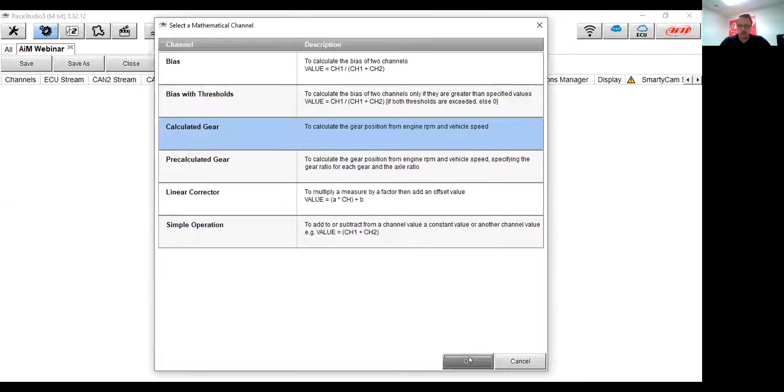Once you click OK there, you get a little window that pops up, and it will tell you your math channel settings - so you've got your name, first things first. Roger and I talk about this, and we definitely agree that this should stay as calculated gear. We think it's always nice, if you're sending your data to somebody, or if you forgot what you were using, to know that this gear was calculated and that it didn't come from the ECU or a gear potentiometer or anything like that. So definitely leave it calculated gear.

If you want to cut it down, you could change it to calc gear or whatever makes you happy there.

The next item down is our sampling frequency. This doesn't actually play a role in the calculation. When you're driving around the track calculating the gear, this is just a matter of saving the data. So it doesn't make much sense to increase this beyond 10 Hertz. We definitely recommend just leaving this at 10 Hertz—it's going to give you the best readout later on.

It's kind of funny when you do these webinars and dig into stuff we've all been working with for years. Cameron, you may have found the same thing—other folks who've co-hosted with us too. The more we dig in to try to teach something, the more we learn. That very topic, I didn't fully understand—I thought it was the calculation rate. It's cool to learn as we go. That's just the output of the data being thrown into the data file. It's calculating much quicker than that in real time behind the scenes, very fast. But that sampling frequency is just what's being used, 10 times per second, to throw it into the data file. It's a cool thing that we all learn every day in everything we do. We go through these channels so frequently you think you know exactly what you're talking about, but when we do the deep dive to present it, I definitely learned a couple things. Pretty cool—an interesting one.

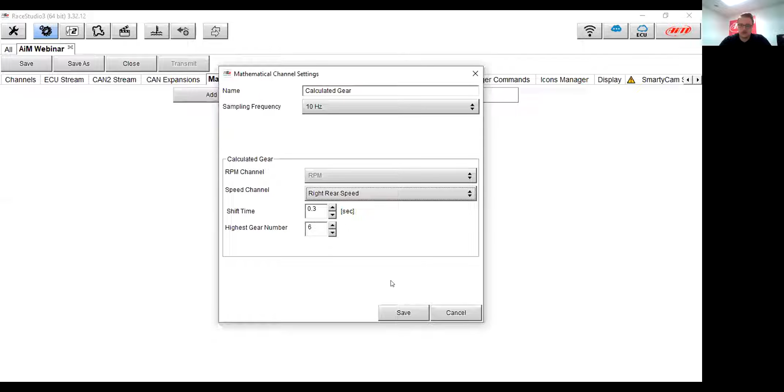I don't want to gloss over the wheel speed itself. It's recommended to use a drive wheel speed that is directly linked to the transmission and engine rotation once the clutch discs are completely engaged. This gives us the most realistic view of what's actually happening with the vehicle. GPS speed isn't going to give you the most accurate information, so you've got the option for GPS if you must, but it's best to use a driven wheel speed. I've got a wheel speed set up here, and if it's a rear-wheel drive vehicle, rear speed is best, so we'll choose that. So we've got those two things taken care of.

Next thing we've got down is the shift time. Like Roger and I were speaking earlier about how we learn things, I actually learned something here. On the pre-calculated gear, there's a little bubble that pops up to explain it, and we've asked to have this transferred over to this side as well—but it's commonly misunderstood.

So this is actually going to be the time that the measured values have to be held to be set as a valid gear change. This is an effort to try and reduce unwanted gear changes. We have to make sure that we have a steady RPM signal after, to make sure that we are going into the next gear properly. We found that 0.3 seconds is actually a good value to use, and it just helps reduce unwanted gear changes.

So we've got the shift time and then highest gear number. It's how many gears do you have? Not neutral or reverse included there.

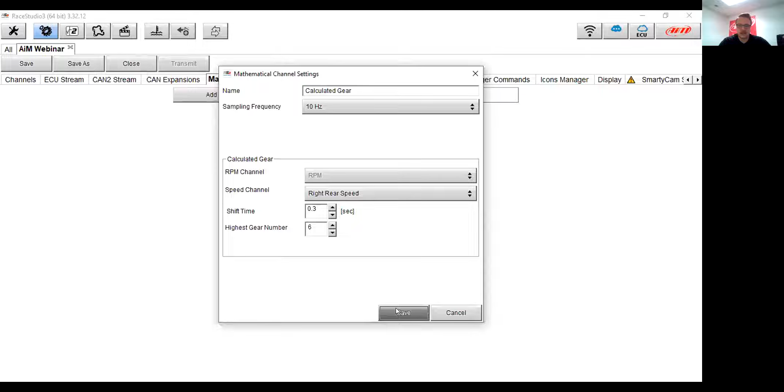So next step, click save, and it's saved. So we've got calculated gear now set up. So the one thing I wanted to show you is just setting it up as a display.

Due to the poll, it doesn't seem like a lot of people like to see it during driving. It looked like maybe about a quarter of you, but we do have a lot of these display pages that have a spot for gear, so it really just makes sense to have it there. And if you're going to be using it, you might as well be able to see it as well.

So you can go in here and just go to math channels and then calculated gear. I always go and just do a drag and drop. So we'll drag and drop it there, and then your calculated gear will be there after you click transmit. That's the big key one here. You have to be connected to your dash and click transmit.

That's going to send it off, and your next step actually will be to go over the learning process. That's what's going to make this process a little bit more difficult in execution, because the others don't require it. So I'm actually going to share a different screen real quick.

So this is actually, I'm going to give a shout out to our website here. We have a really great frequently asked questions section. When going over and trying to make sure I got everything set up properly for this webinar, I referenced the website, and it actually gives you the procedure right here to go through and do the learning process.

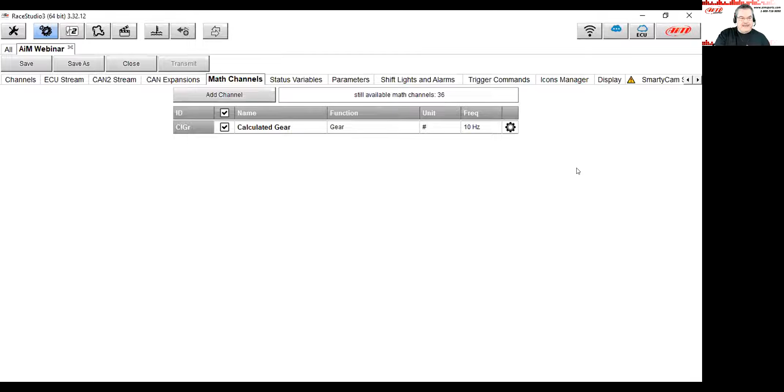Perfect, thank you. All right, so now the next one that we're going to go over is actually going to be the pre-calculated gear. We can't have two gear calculations within the same configuration, so we're going to go through and delete this one first. The way to do that is you just go over here to the gear and click delete selected math channel.

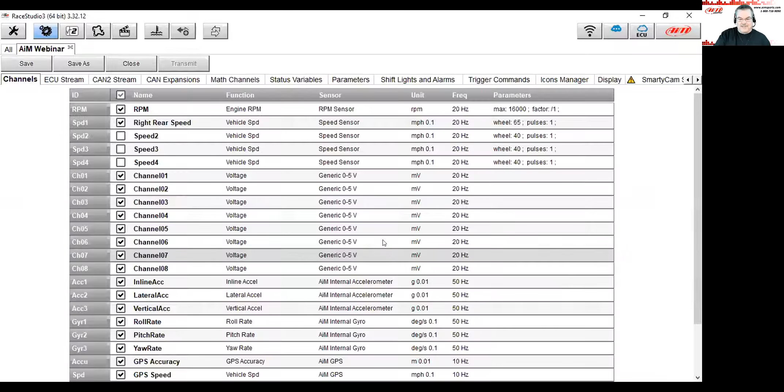Looks like you're back up and running there, Cameron. Looks like Zoom may have jumped out on us. What do you have going there now? I'm not sure what happened, but it went through and deleted the math channel, but we'll go back in and I'll show you how to do that in just a second.

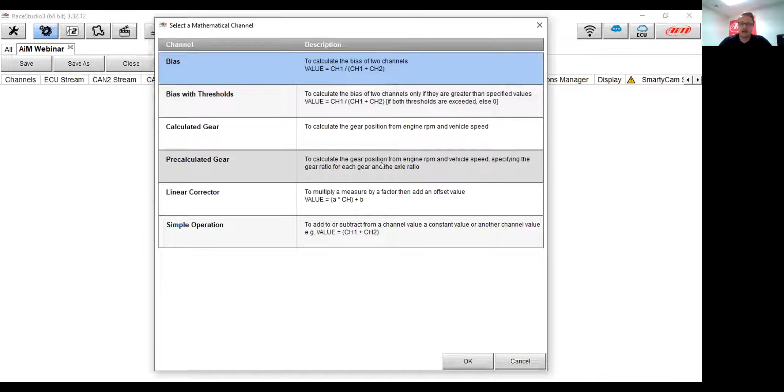So we'll go ahead and move back onto the pre-calculated gear. Again we have the quick description here. This is very similar to calculated gear, except we're just adding a few things. We're calculating the gear position from engine RPM and vehicle speed, specifying the gear ratio for each gear and the axle ratio. So we'll select that and press OK, and that should open up the very similar channel settings, except we're obviously adding a few things.

So down below that is where the new things, where the pre-calculation is going to start. Our next item down is going to be the wheel circumference, and this can be measured in a couple different ways. You could use an equation, do diameter times pi if you like, or you can measure around the wheel. There's some different ideas around the meaning of wheel, but wheel and tire will get you the same result.

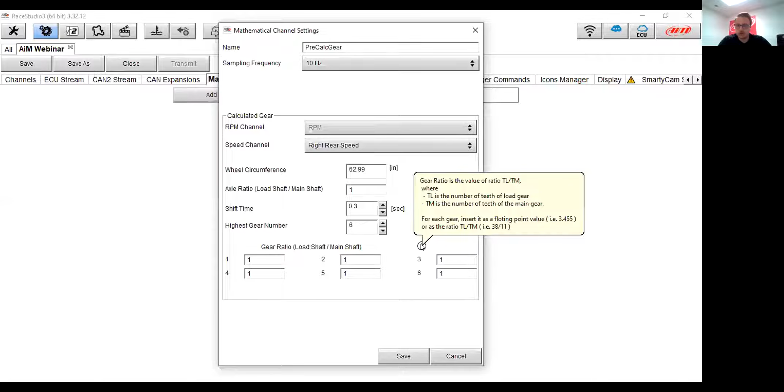Highest gear number, again, choosing your gear, neutral and reverse not selected or included. So, our gear ratio - this is all information that should be able to be found. We have customers that will find it from the internet, you can grab it sometimes from your user manual, and if you have aftermarket gears, you should be able to find it from that person. Same thing, this can be expressed in decimal or in a fractional value. If you need help, you can go over the bubble and it will tell you what it's looking for there.

As you're plugging those in, Cameron, to start that process - Antonio asked a question that you actually answered just as he was bringing it up - but to know the values of the gear ratio and the shift time, should we look at the workshop manual, or is an approximation enough?

An approximation is not enough. In the gear ratios, the axle ratio, and the forward driven speeds, you need to have those because it's looking at the RPM - what the RPM should be when it's going from the crankshaft through a gear ratio, transmission, third gear, whatever it happens to be, then all the way back to the rear gear, out through the tire size. It's doing the math on that in real time, and when it finds that there's a match, that's when it knows to show fourth gear. So that's the answer to that one.

Okay, and then Cameron, plug in some numbers. Well, actually I didn't bring that sheet over here with me for some reason. Just plug in any old number. So off memory, we could do like 3.895, doesn't generally matter - you're going to see a larger number shifting down. We could do like 3.586, and then you'll see like a 3.256. So you just plug in your numbers.

As mentioned in that question, you can find these numbers if you've got a Miata or a Ford Mustang or whatever it happens to be. Just do a quick search and you can find the stock gear ratios for that particular car, and plug them in. So basically you're just going through plugging in these numbers, and we'll go ahead and finish this, 0.852. One thing I learned while messing around with this, you can actually tab through these as well, which is nice.

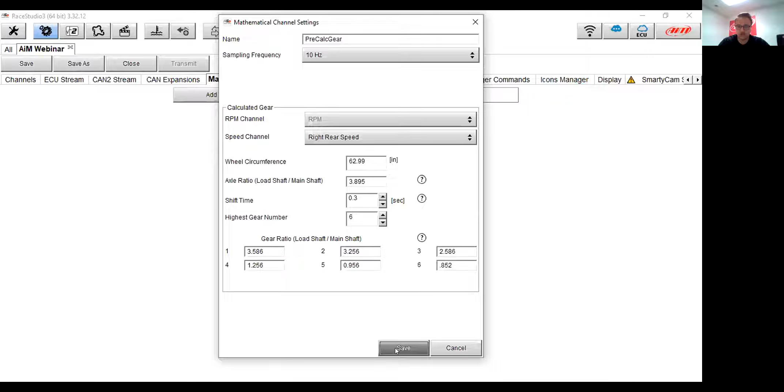So last step here in this screen is to go through and click save. Going through with the display, it's going to be the exact same thing. We're going to go to the math channels, we'll find the pre-calc gear, and you just drag it onto your display wherever you like for it to be. Then after you're done with that, transmit.

In comparison between the calculated gear and the pre-calculated gear, the great thing about pre-calculated gear is that you don't have to go out and do that learning lap. It's already pre-calculated. So you go out and start driving, and as long as all the information we put in there is correct, you'll start getting gear immediately afterwards. Yeah, the pre-calc gear is by far my favorite of the two.

We're typically going to know what our gear ratio is and our individual gears, and we do not have to do that process of going out and having it learn, as shown in that document that Cameron shows there. So for me it's a little bit of extra work to get all the right numbers for the pre-calculated gear, but in my experience, and from chatting with users, pre-calculated gear is almost flawless. If you've plugged it in correctly and you transmit it into your gauge, you could put the car up on jack stands and just run through the gears, and the gear position on your display is just going to be right off the bat, let alone out on the track, since you're using a driven wheel. So it is well worth the extra little bit of effort to do the pre-calculated gear, in my opinion.

Absolutely agree. Cameron, there's a question here that talks about the difference between motorcycles versus cars when it comes to the gear ratios that you plugged in there. We just plugged in a rear gear ratio because that's more of a sports car kind of thing. But when you have a bike and you have ratios, tire sizes, and sprockets, how do we handle plugging in something that's through a bike or a bike motor that's in a sports car?

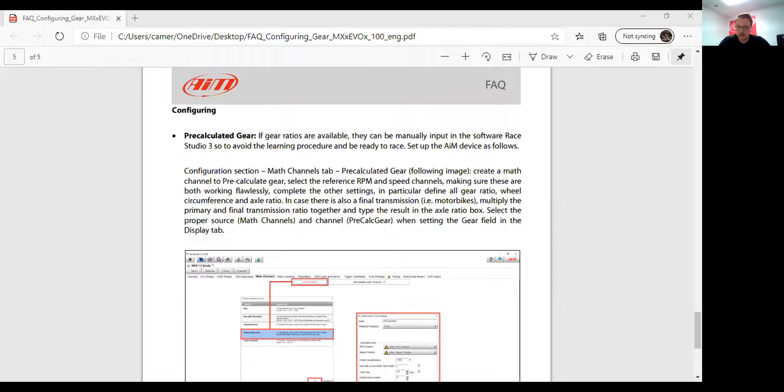Basically what we're going to have to do is, if there is a final transmission, you were going to go through and multiply the primary and final transmission ratio together and type the final result in the axle ratio box. So I'll show you. I'll go back in Race Studio 3, and this will go back to the math channels, and you just double click to edit your axle ratio here. So that's what you're going to have to do.

So in the end, if there's a multiple step, some of the off-road trucks will have, and even sprint cars and some other things, they may have a quick change, or an underdrive, and that just needs to be factored into your rear gear and your front and rear sprockets, whatever it happens to be. You just got to do the math. This has to be the ratio that it's changing after it comes out of the gearbox, in effect, right? Okay, perfect. Sounds like we got all the questions and answers handled from that.

Any other comments or questions you have, Cameron, as we're heading out of that piece? Not on this subject, no, I think we covered it really well. I'll keep an eye on the Q&A and see if anything new pops up, and we can circle back if need be. But I think that pretty much covers it.

Perfect. Let me share my screen and we'll jump into Race Studio 2, and just chat about a couple things Cameron hit on that I didn't want to jump back and forth between different pieces of software for. He talked about having a clean RPM and speed trace, and the best way to do that, frankly, is in a previous run, the weekend before you're going to set this up, grab some of your data and take a look at it.

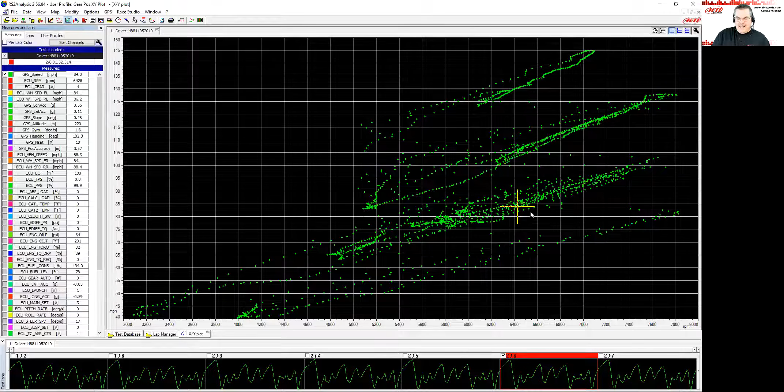You can see by looking at these that you've got these basic lines of data, right? You see these clusters of dots that are together, and you can see this car, during this lap, was in four different gear ratios. If I turn on the gear channel, what the software is really doing - either the firmware on the logger or now the software in Race Studio 2 - is we look at when these dots are falling in this array, in this 45-degree line, and then do the math with some float.

So the next thing Cameron talked about a lot, and this is very, very clear when I do it here, is this is GPS speed.

Remember we talked about which speed sensor to use, and hopefully you have some options. You have GPS speed, which is accurate and good enough for everything we do, but there's not a direct connection to the engine crankshaft when the clutch is out. It's a little floaty—you're rotating around corners, doing all these things, and you can tell there's a lot of green dots all over the place here.

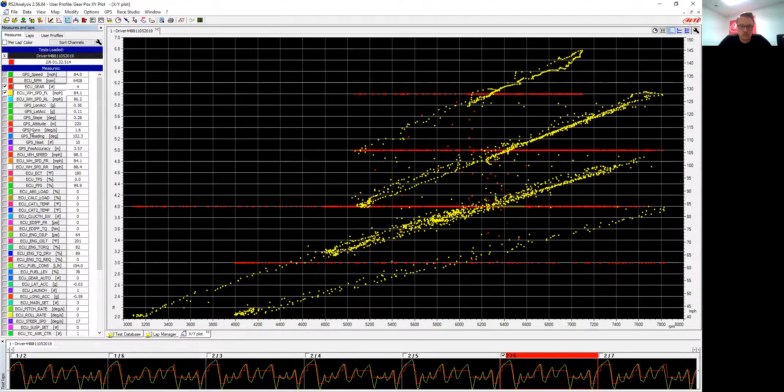So let's bring up the front wheel speeds, and turn off the GPS speed. Look how much cleaner, how much more those dots fall into a nice line. That makes it much easier for the logger or the computer later to understand that they're falling into that line, and then display third, fourth, fifth, or sixth gear for us in this particular instance.

And now that's a front wheel, so that's still not even a direct connection. So let's throw in the rear wheel, bring it up and scale it. Look at that rear wheel speed compared to the GPS and the front wheel ones we had.

This is why we always suggest that if you have the option, it's much better to grab a driven wheel speed sensor's data. So once the clutch has been released, and you're off the clutch and throttled down and going, these become very, very much better locked RPM versus speed, and it's much easier for us to calculate a very, very good calculated gear to show you on the display or in the software later.

So I'll bounce back to GPS speed and turn that one off—see how much float there is in that one. And if we go to the front wheel speed and turn off GPS speed, it's better, it certainly would work good. And then with a driven wheel speed, it's very clear that getting a nice, good, clean speed sensor trace on your driven wheel will help with this process.

Okay, yeah, perfect. I think that's great. I think it really helps show why so much better.

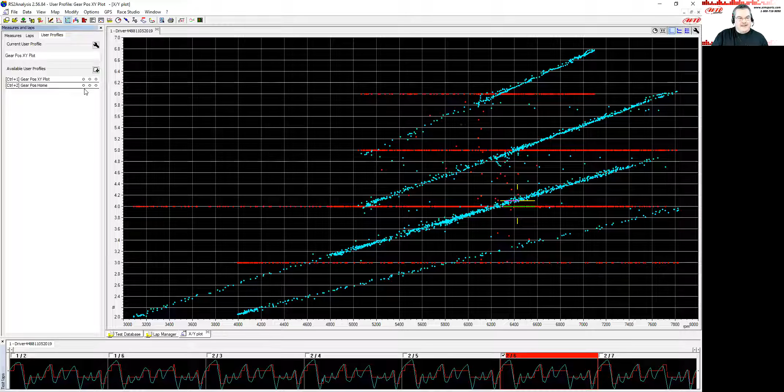So let's go into the measures. Oops, I wanted a user profile, and I've just got one called home—it just kind of gets me back here. Turn the measures on. Let's talk about the math channel you can do afterwards.

Our poll showed that 95% of you really want this data during data analysis, and about 25%—I still have the poll running over here on the side—really wanted it during the run. There are good times you might want it during the run, but most of you really want it after it later. If that's true, maybe you skip doing the pre-calculated gear on the hardware and just do all the math here later. It's up to you how you wish to do it.

We have math channels—they're already canned, already built, ready for you to take a look at in Race Studio 2. So I've got this ECU gear that's right from a sensor on the Ferrari 488 Challenge car, and you can see how it's popping up here to sixth gear, and here's its downshifts. But let's calculate one, just like you would. I'll start from scratch—if you have not used math channels before, I'm going to walk you through the entire process of creating a math channel here for gear calculation.

So we go up to the math channel functionality, and we click on that. If you have not done any math channel work before, we've got a session tab and we've got a general tab. Under your session tab, there will not be any math channels there if you have not done some in the past and have them automatically being added to every test you open. So a lot of you are going to see this.

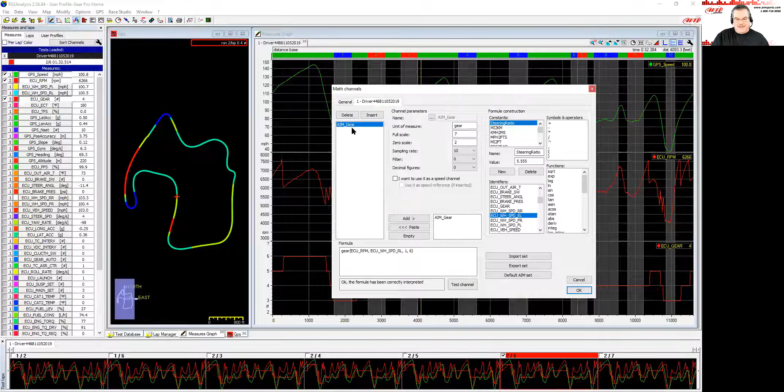Okay, when all that's done and we've got that figured out, I've called it AIM gear, just left it at the standard name. Let's click on OK.

And what has happened here is we've now got a gear, AIM gear, up here at the top. I'm going to go ahead and put that down right on top of the AIM ECU gear, by just clicking on the little numbers and pushing it down in our scales. Right now it's in the upper one. I'm going to click on that right here and right here.

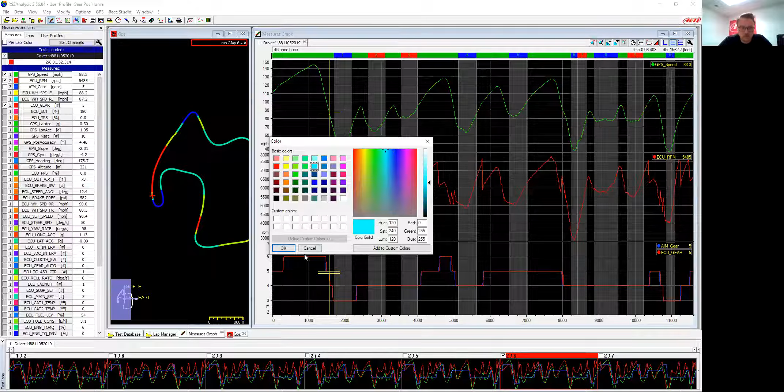Now let's make it a blue, maybe a little bit of a softer blue so we can see it a little bit better. Look how close our calculated gear now, using the driven wheel, shows up over here, and you can see that it matches almost identically with the calculated gear from the gear position sensor.

So I wanted to show you guys that this is a great tool. If you do not have a gear position sensor, yeah, you can spend the time and effort to put a gear position sensor on the car and actually have it as an analog channel. But if you don't have that, coming in here and doing the math is not a bad option.

You can see that there are slight differences, right? And almost all of those you'll find are on the downshift side, where it's taking that little bit of time as the clutch comes out. The gear position sensor, as soon as the driver, probably using hand controls in this particular case, is changing gears, it's working here, but until the clutch is released, that's when the AIM gear will calculate its way in.

So, kind of an interesting thing. The other thing I wanted to do, now that I've done that, is I also built a couple of other math channels.

We've been pushing pretty hard for you to use a good speed sensor, right? I've already calculated a couple of these here - an aim gear using the GPS speed, and an aim gear using the front wheel speed. Let's bring those into this test and take a look at them.

And even if you only have GPS speed, maybe you don't have any wheel speeds but you have RPM - yeah, we're telling you what you probably ought to do to get the best results, but how bad does GPS make that look, or front wheel speed that's not a direct connection?

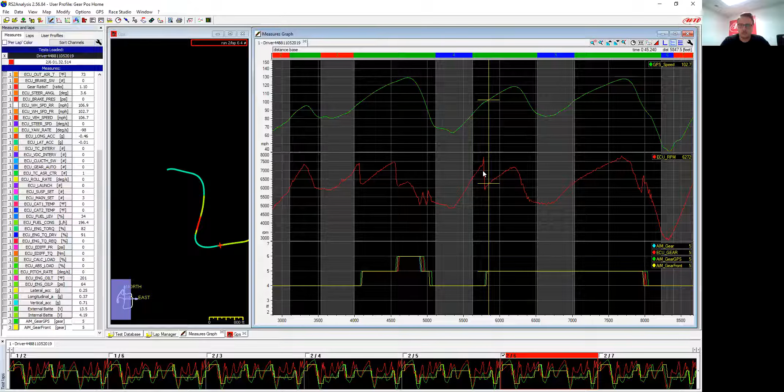So pretty cool. I would always continue though to use that good wheel speed, driven wheel speed, to do your calculations. But if you don't have it, don't think in your mind that it just is not going to work for me because we don't have that good driven wheel. You can still do some pretty cool stuff with speed sensors that aren't a direct connection.

Okay, perfect. The one last thing I'd like to show you, and maybe there'll be a couple more questions or something, and Cameron might want to add a couple things. But one of the other things I wanted to show, just so you guys could see it, let's turn off...

I'm gonna leave the gears on, and one of the things I have, and it's in the math channels that a lot of you have already asked for - there's a little math channel bundle that I send out to folks that want to maybe play with math channels a little bit more. I've got some spreadsheets where it talks about all of the math channels, and I've got the importable math channel files, so you can just do the import and have them working and ready to go.

It's got the switches for when you're on the brakes and when you're not, and the coasting channels and all of that. But one of the ones included in there is this one that I call gear ratio T, and T of transmission is what we're looking for. I'm going to turn that on, bring that down, and put it in the box below that, in its own little box right there.

Okay, and you can kind of see what we're doing here, and what this... let me open up the math channel and let you take a look at it. Gear ratio T - here's the math channel itself, right?

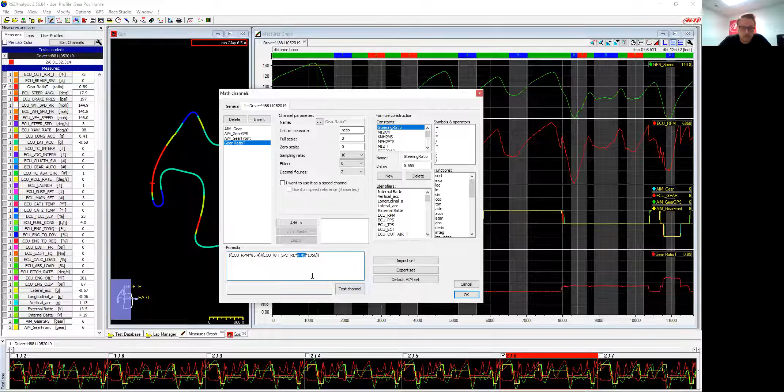What this is doing is, you have to know a couple things. If you know your tire size, your tire circumference, the same thing Cameron talked about in one of those other things, and you know your rear gear ratio, I've got a math channel description that talks about this a little bit closer.

We plug in our RPM, our tire size, our wheel speed, and this is the driven one, and our rear gear. There's some math that has to happen in order to make it all work. But in the end, what we're outputting, which is kind of cool and ties together with this because we're doing calculations, is no matter where I put this cursor, you can see what the internal gear ratios are of your transmission.

In this case, sixth gear on this 488 Challenge car, I went out and did a little bit of research and found the rear gear ratios, the tire sizes, and the transmission gear ratios, just to work it backwards and make sure everything was good, and it is.

Look at this. I can put this here, and it's about a 0.89 sixth gear ratio. If I come in here to third gear, the 1.73 on third gear ratio. Here is fourth gear, 1.35.

A couple little tricks I do with that is, if you use your delta function, I can just click at one side and then the other. One of the things you can turn on with your delta function is not only the last click, which would be right here, which is 109. The second value in all your delta stuff is always the difference between the two clicks.

You can turn on your delta function by coming to options and settings. What do you want to show as a third value with it? I'm showing average. Let me jump out of there.

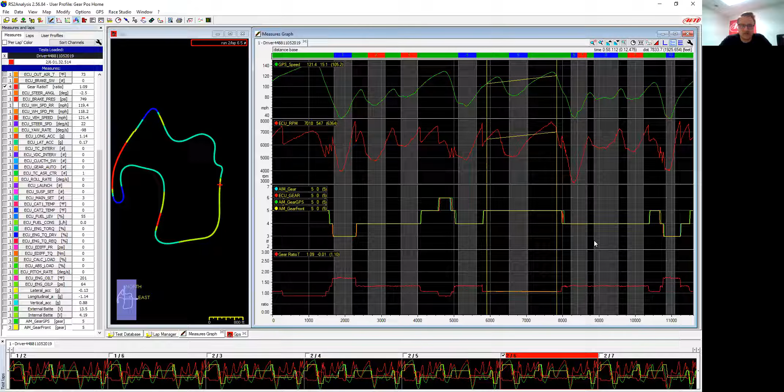David does have one there - he really needs to tell us what the 105.6 converts to. I cannot remember, frankly, off the top of my head, I can't either, but I probably better stop there. It is part of the math, and it does help convert it. I probably better leave it there, or else I'll just be guessing at this point. If I looked at the math channel a little bit, I would figure it out as well. But it is there, and I can share that. It's for English numbers - if you're using metric, it would be a different value. But if you want to dig into that more, send me an email, and we'll get that figured out for you.

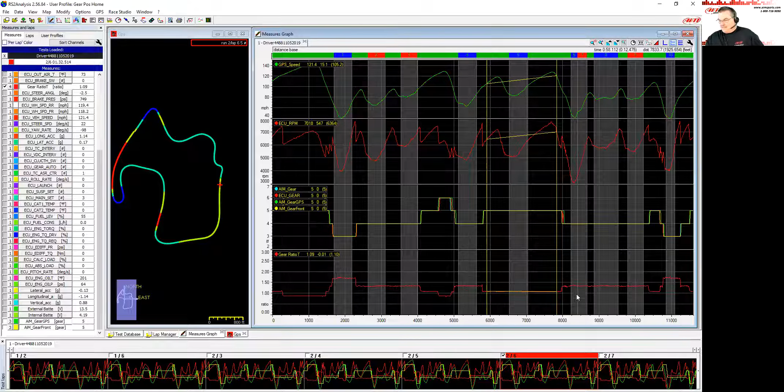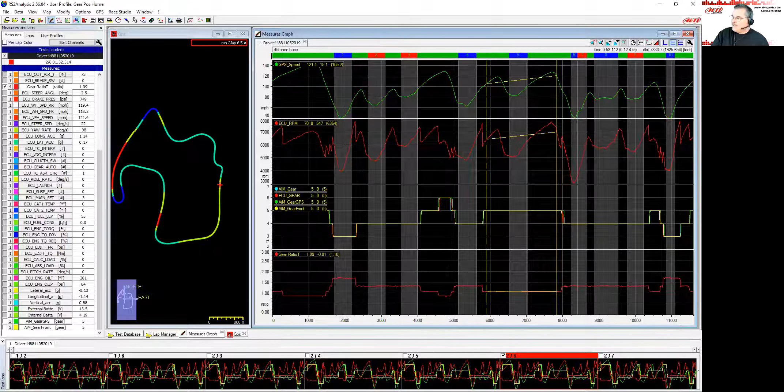I think you did a great job filtering from the calculation that we'll do on our side to being able to see it afterwards. I think what is so cool about it is you have some options as users.

If you want gear position, and hopefully your ECU will have that gear position in it. If it doesn't, not all is lost. We can either calculate it on the fly with the two methods that Cameron talked about, or once you download the data, we have math channels internally to do that, and we can do some other cool things with the math channels on top of that.